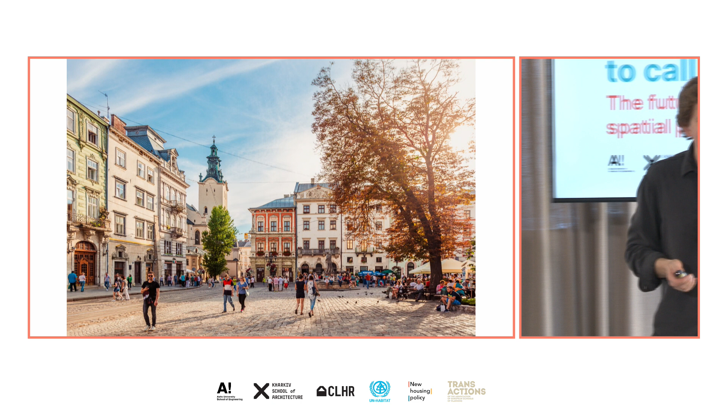So let me start with this beautiful picture. I guess everybody saw it. This is the city of Lviv, which is included in the UNESCO list under preservation. Of course, it's also a major point for tourism in the country, for people to come and see Europe in Lviv from other cities.

It's also very important that this kind of life and even attractiveness is preserved during wartime, so people from other cities and localities can shift a bit, have a rest from their environments which are less safe than Lviv, and also experience this culture and visit museums and different institutions. I guess there are some people watching through the window.

So we cannot exclude the strikes and attacks on the city, because there is indeed no safe place in Ukraine, in the whole country. Basically 40,000 Lviv citizens, including men and women, are currently on the front line. This is our reality. Every family, everybody has some friend or relative on the front line and worried about their life, and also knows people who already died protecting our land.

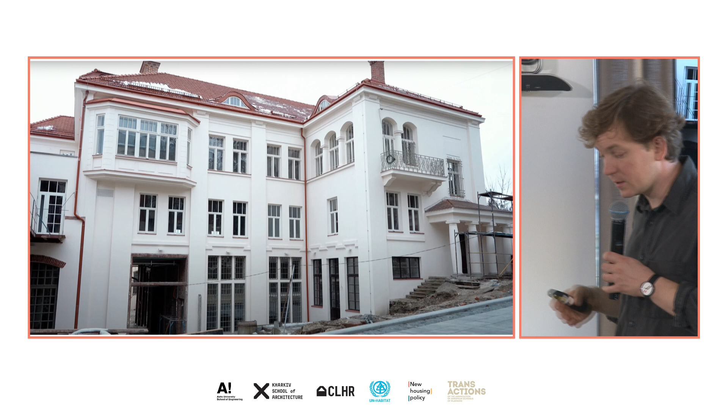Another example is the tram depot and first electrical substation, built, if I'm not mistaken, by architect Kamil Brodsky in the early 20th century, and now renovated for the needs of a cluster of different economies. There will be co-workings, event spaces, and different kinds of activities. We hope that—and you know, it's happening right now.

So while there are sometimes these rockets falling on our heads, at the same time, people invest and renovate, putting brick by brick, piece by piece, to really take care of the heritage.

Basically this process started very much in these years, with the project by GIZ, the integrated development of the city of Lviv. There were different workshops and programs started to educate renovators, restorers, people who can renovate doors, windows, different wooden elements. And basically the program of co-financing by inhabitants also started.

This is also the time when there were first discussions on how we should renovate the whole inner city in general, about introduction of public spaces, about changes in mobility, bike infrastructure, and other things. Iris Gleichmann was guiding this project. I just met her a few days ago.

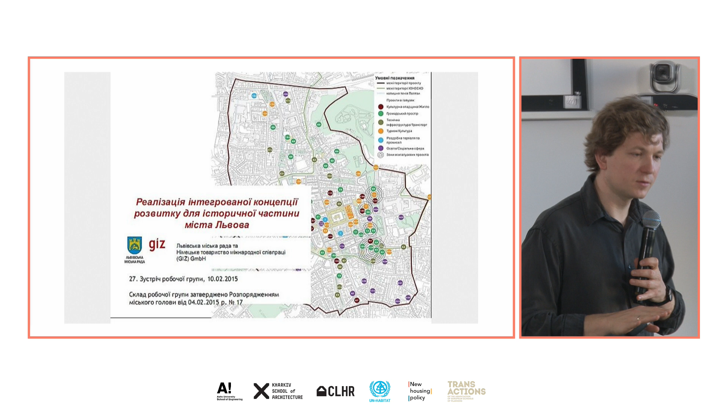One of the priorities was, of course, working with the question of the city as a city of different religions and nationalities, communities of Jewish, Armenian, Ruthenian meaning Ukrainian, and also German and Polish, having this multi-cultural image of the historical city represented today. So one of the first projects was the synagogue square, marking the places which were important and also dramatic for the Jewish history of Lviv.

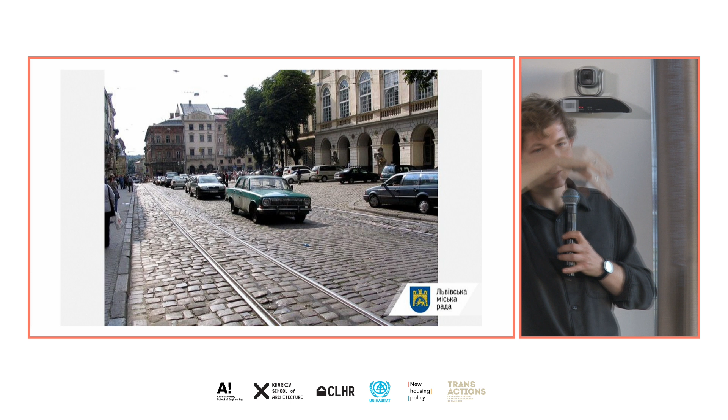Basically, many things at that time changed. We have this Rynok Square, the main square of the city, looking like that. This was, of course, a place for the car of the mayor, some vice mayor, and so on. It was like this in the 90s, with even a place for the chief architect, maybe.

But now I came here with a bike. When it's possible, I always use the bike, and I also have a car. I use it, but I have no possibility to park it closer than 500 meters to the workplace. It also becomes more expensive every time, and it's good that it's like that, because it's indeed a shift in our logic of how to use mobility in the city.

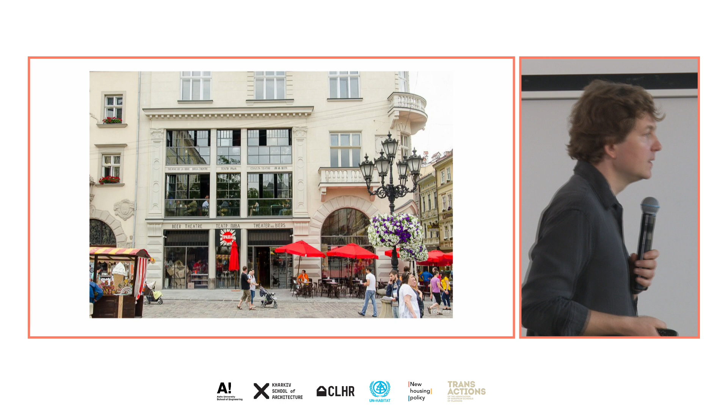So basically, freeing the space from the cars and allowing people to use it became a big impact for renovation and for developing tourist attractiveness and tourist infrastructure. Also, trams produced in Lviv and a new tram line, unimaginable before, became a reality, connecting a big settlement, a neighborhood in the city, with the city center.

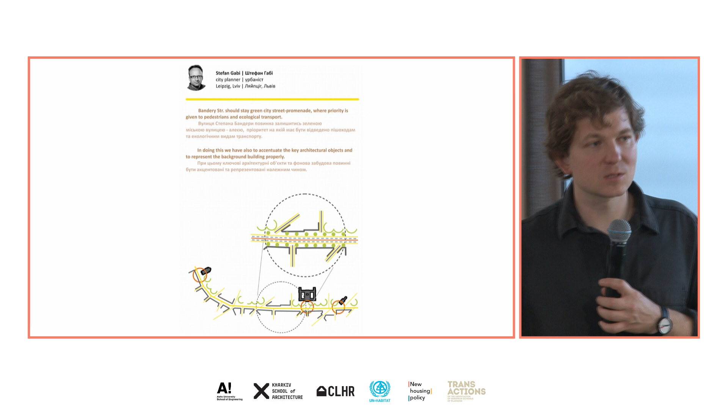And it's all with participation, with many discussions, many workshops, and so on. Also the renovation of Bandera Street, where Stefan Gabi was working at the time, became a very important step in rethinking streets not as roads, but as spaces between the facades, so there is space for everything and everybody, and we should weigh the importance of different users and make it accessible for everybody. Many things like that, also working with the space and with some dominant objects, buildings, places, and so on.

And other spaces, I will not show everything, but that gave us the idea to look at the city in general, to develop the integrated development concept. I'm slowly coming to the topic of the forum, the spatial planning. Basically, we thought, what if we do this integrated development concept for the city of Lviv?

At that time, the chief architect Julian Chaplinsky invited me, after I proposed to him that there is this integrated concept in Vienna, let's do it in Lviv. And he said, yeah, let's do it. So I have a lot of things to do, so please, if you have such an incredible idea, just visit all these meetings with different departments and let's do it somehow together.

For me, it became very clear how little communication there is between different institutions in the city hall and departments, and the lack of that is just incredible. This project became like a platform for this interaction.

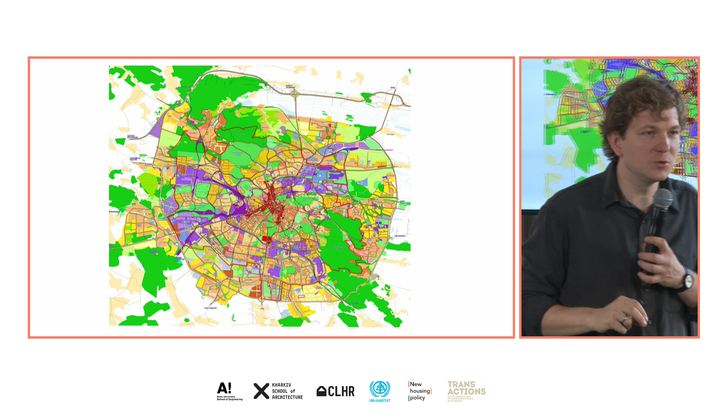It's also planned with all these instructions on how to color things, what fonts you need to use. But at the same time, it's planned so it's maybe understandable only for people who can read 50 shades of violet or something, because it's impossible for the naked eye to differentiate between these shades of every color. So I believe that in terms of graphics too, there was a need to shift to something else.

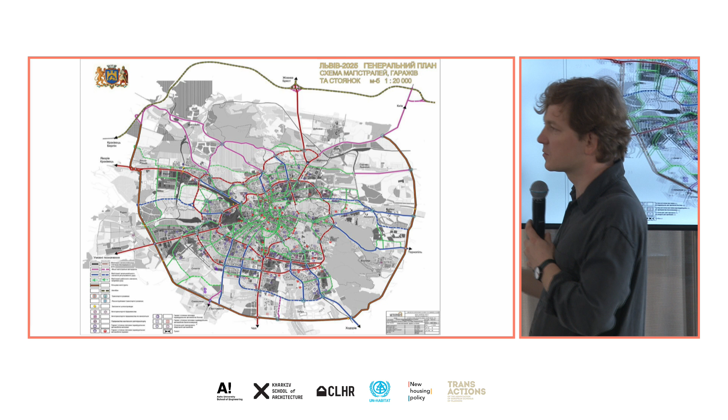Also, every one of these master plans is supported by different schemes, for instance on mobility. So we see that the idea to extend the city, to build it outside on the outskirts, also involved building many roads, ring roads and tangents—things that would really impact the city, making it car-oriented, I would say.

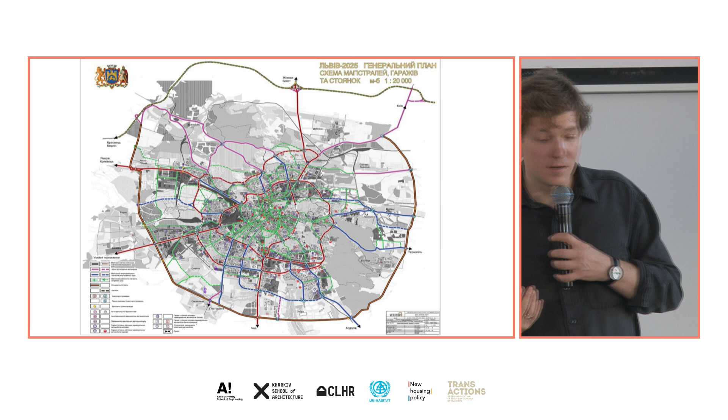There's a detail that all these plans needed a lot of investment to build like 1,000 kilometers of tunnels and ring roads, like highways. It would cost money that maybe the city of Zurich doesn't even have. So we were lucky—there was no money to really build all these ideas.

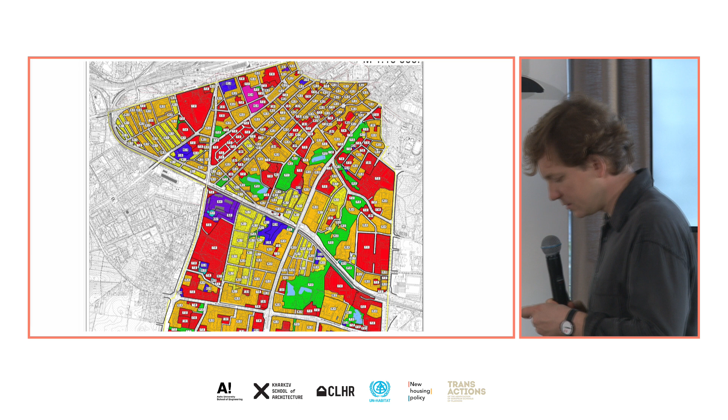And then, as I started to mention, there are official layers of documents and formal planning documents in the country. So there is this master plan, and there is also a zoning plan. The zoning plan is an addition to the master plan—it's meant to be a more detailed version of the master plan.

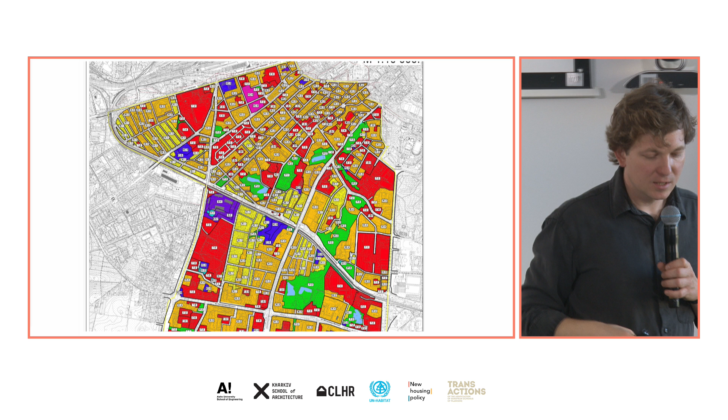So when there is a master plan housing area, here it's housing area up to 6 floors, housing area up to 12 floors, housing area up to 4 floors—different kinds of gradations. These plans were developed through 2014, 15, 16, and became part of the master plan.

And then there are the detailed plans—in Germany, Bebauungspläne—and this is a kind of document that served us to improve certain places, because when there was a brownfield to change through the master plan, it would take another 20 years with all the procedures. It would be almost impossible to do it.

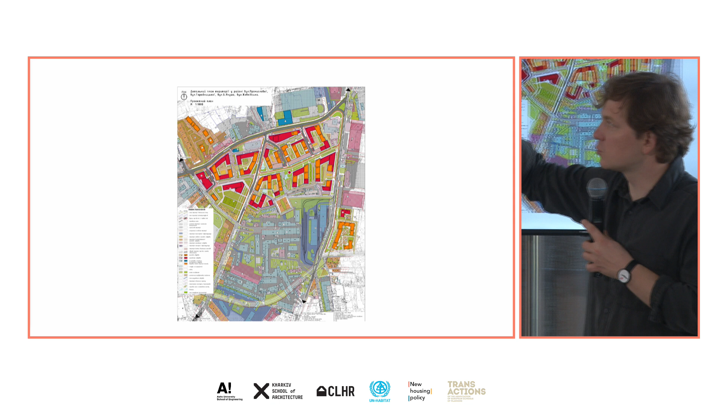Here it was possible to rethink bigger areas and do a master plan with a new approach—to create a boulevard, to create courtyards and a school, to place infrastructure that is absent in this kind of district.

Basically, we came to changing zones in this zoning and in master plans with these detailed plans. It's actually done all around the country, and this is the procedure for how it's done. Yes, it could be criticized, it could be bad or good—I think it's just a reality.

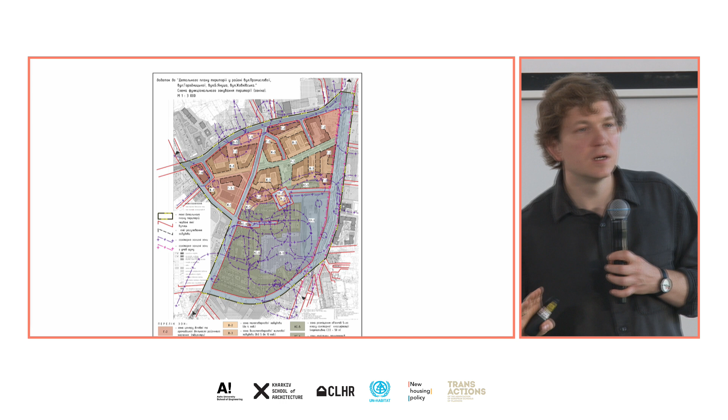We try to avoid the threats that this process can bring. So in general, as we develop these B-plans, we look a bit wider at the general picture, analyzing the situation across almost all of the city, so that these changes or improvements are indeed improvements and not, let's say, making things worse.

But starting with this integrated development concept for the whole city, we thought, okay, let's think a bit from scratch.

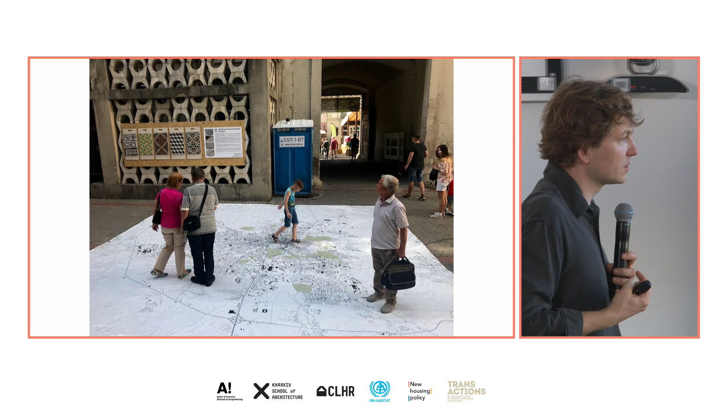Let's invite inhabitants. There were many meetings and presentations in different parts of the city, communities, districts, and also here in the courtyard of the city hall. We printed, we drew, we were really open to see the things, but we also spoke to the people and explained what is important in today's world, with the prescriptions of UN Habitat, of different European institutions, of the Leipzig Charta for integrated development.

What are the basics for spatial development? Based on all of these meetings and discussions, we came to a very simple conclusion: it's important for the future to stay a compact city, not to build on the outskirts, or to build minimum there—instead to think about renovation, improvement and intensification of the inner resources of the settlement.

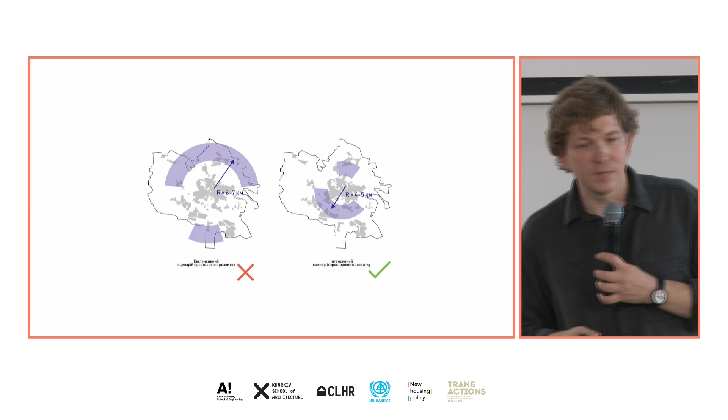And basically, we still had a lot of brownfields and so on. A city with a radius of 6-7 kilometers becomes a car-oriented city. But a city with a radius of 4 or 5 kilometers is, you know, a tram city, a pedestrian city, a bicycle city.

So it's really important for the city to stay compact. It's also interesting to compare the city of Lviv with the city of Vienna, for instance, but we can compare with others in Europe too.

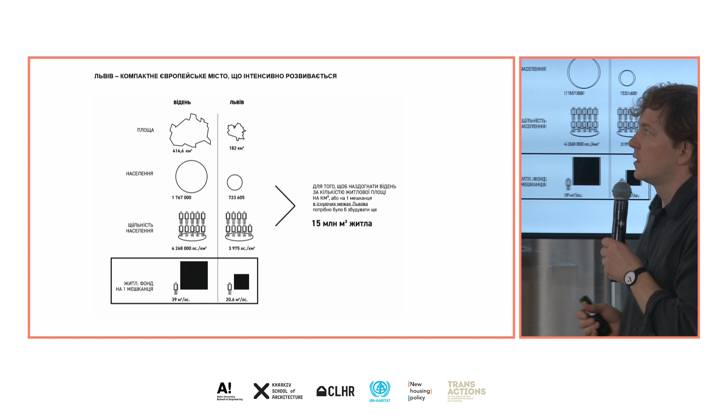So basically, the city of Vienna is more than double as big, also in terms of population. The square area is 414 square kilometers, Lviv almost 200, like 182. The population is 1.7 million here, versus 723,000 inhabitants.

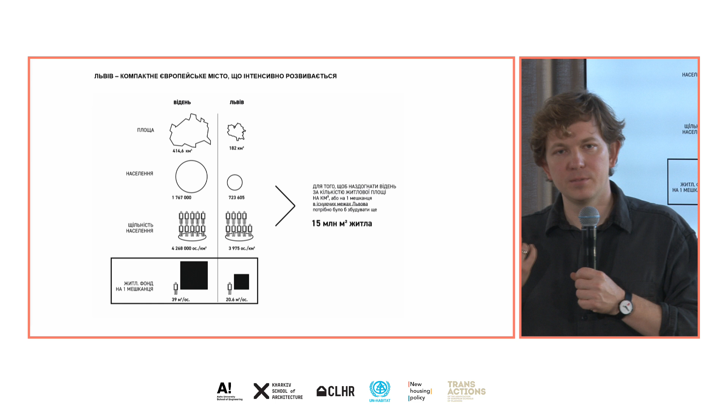If we calculate the density of population, it's almost the same, giving us plus minus 4,000 inhabitants per square kilometer. But if we calculate the buildings, in Vienna per capita there is now more than 40 square meters, actually 45. In Lviv at that time there was 20, now it's 23.

So to imagine, to have the same quantity of area dedicated to living there—just to live, not to work, not counting offices, not counting that Vienna also includes the Danube River, mountains, parliament and so on—just for living space, we would have to build another 15 million square meters inside the existing borders of the city.

Just for the cities to be compared in terms of infrastructure and buildings. So it was an important comparison for us, and it gave us the idea that there are still resources in the city—we indeed can be densified.

This is my colleague Marina Polishak, who at the time did an incredible job. She calculated every square meter in the city—there were huge tables and calculations, and we could compare the density in very small clusters.

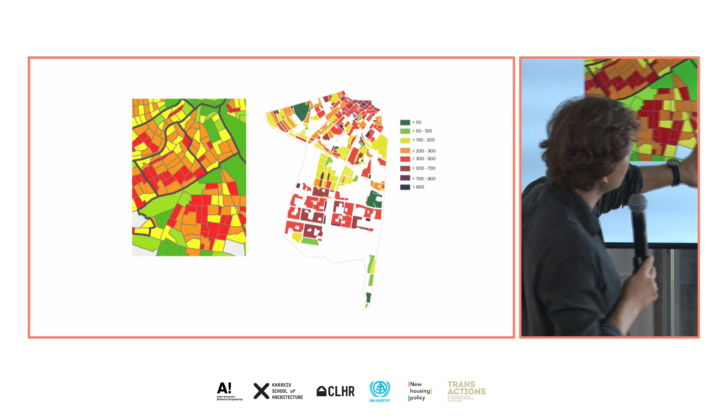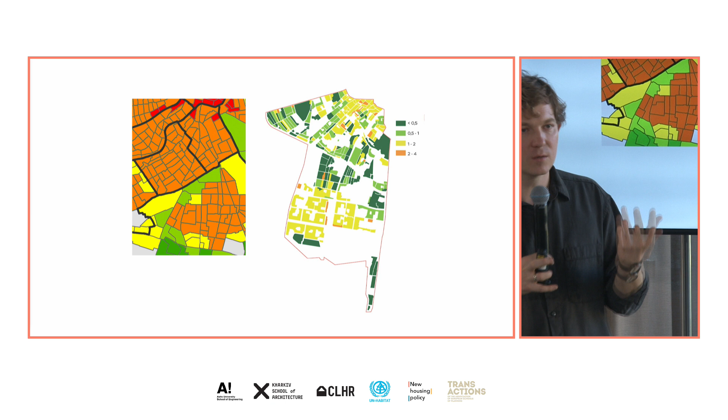This is, for instance, a comparison between Vienna and Lviv in terms of inhabitants. You see the density of inhabitants is almost the same, sometimes even more on some clusters. But if we compare the density of buildings, of housing, it looks like this—you see this density and this density at the same time. These three generations of families living in one apartment is very visible in these kinds of schemes and examples.

So basically, the idea we took as central in the integrated development concept was really not to extend the city outward, to let it be a compact city for the future, and to question all these ring roads and car-oriented infrastructure and construction on the outskirts. In many cases, also the intensity of construction—yes, we can have some development, but maybe 4 floors instead of 16, instead of crucially changing the image of some neighborhood, some village, and so on.

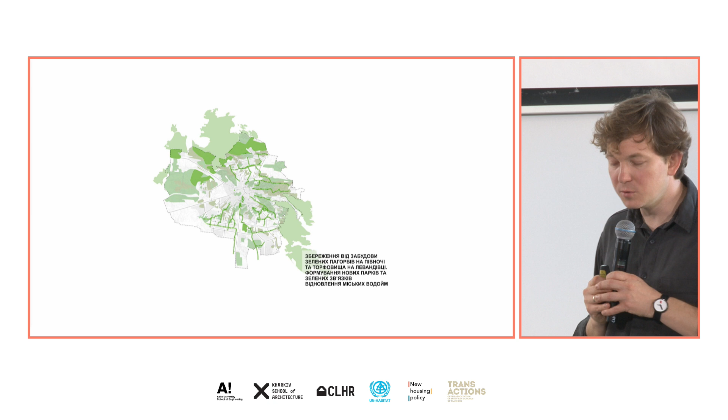And also here, this is the basics for the city, which is a very landscape city with a lot of green connections, important forests, a unique landscape consisting of different natural environments that collide almost in the city center. So basically this should be a framework for developing the city.

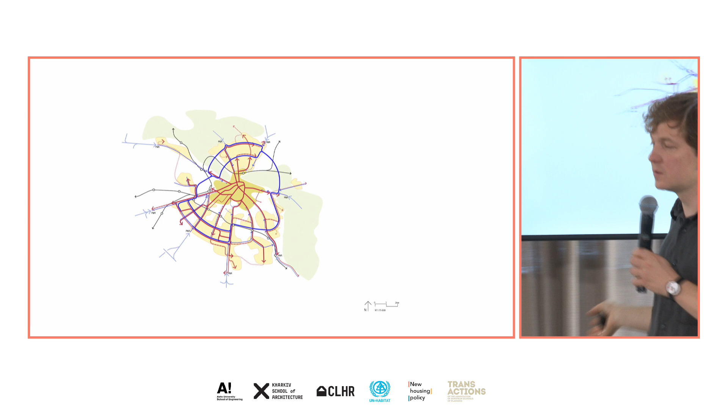And of course we have these resources, and we identify the crucial elements to develop the city, crucial spaces to change, to rethink. We also saw that in terms of mobility, there should be priority for public transit in the districts around the city center.

But there should be a dominance of public transit in the city center. It became also the major idea for the sustainable urban mobility plan developed in parallel to the integrated development concept. And there is Pavlo Sirvatka and Alexandra Sladkova, who worked on the sustainable urban mobility plan.

So when we took all of this together, it became an integrated development concept with the definition of centers, sub-centers, the idea of a 15-minute city, having sub-centers, densifying the axes—not roads going into the city center, but axes of the city densified with urbanity, with this quality found not only in the city center but also in other places in the city, with short contact to green zones and so on.

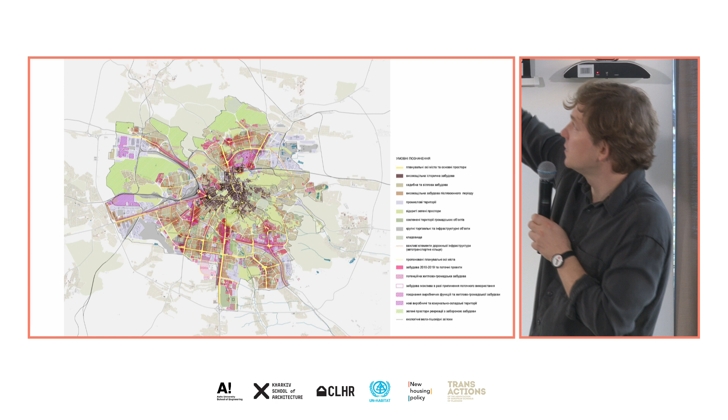So in general it's more detailed, but you can also compare it to the master plan of 2010 and see that it's even more understandable—you can see even the Rynok Square and the City Hall and all the spaces, which is important because spaces are the basics of the city. And the street is the most important public space, actually. We have to think about it as a public space. So in this image, we wanted to give this idea also drawn out.

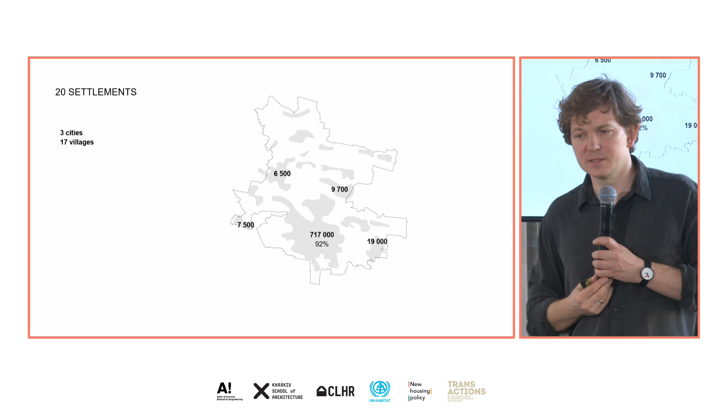Now we have new challenges in urban development for the next concept for spatial development. Since a few years, we became not just a city—here is Lviv, the city, down there—but we became an amalgamated community consisting of 3 cities and 17 villages. This is an important challenge because nobody in Ukraine did this kind of integrated development concept for the whole territory.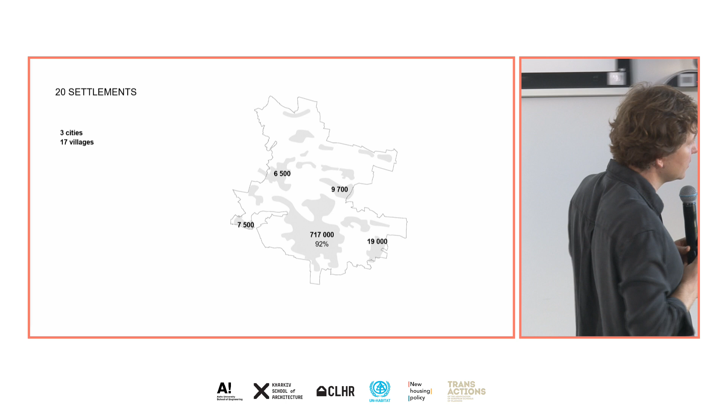We started the process and are now in the middle of developing the integrated concept. We've already held a few meetings where we presented a lot of ideas and reached many people. I know many people sitting here are involved in the process, and it was very important for us.

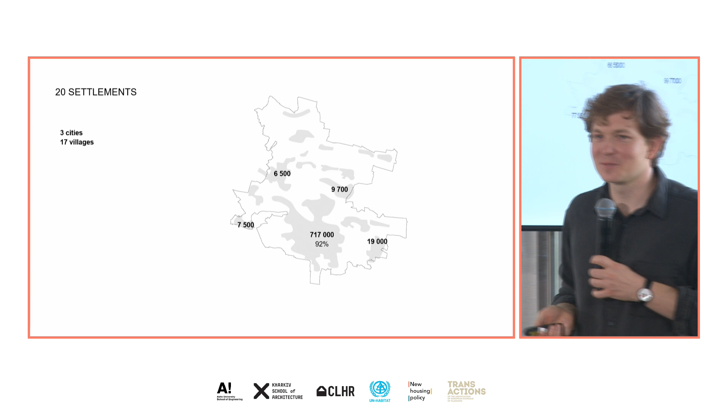After this informal process, once we finish the integrated development concept, we will move to the formal one, which is new in our law and is called the comprehensive plan. In Ukrainian it's named 'complex plan,' but rather it should be 'comprehensive' in English terms. We have many sketches on this, but it's very raw, just where we started.

Basically, what is important is to know what will happen with the demographics, and this is crucial. If we look at where we are now, in 2024, it looks like another 12% of inhabitants. Many IDPs came to the city, and they're still coming. This is not our own research, it's the statistics of the oblast, of the region.

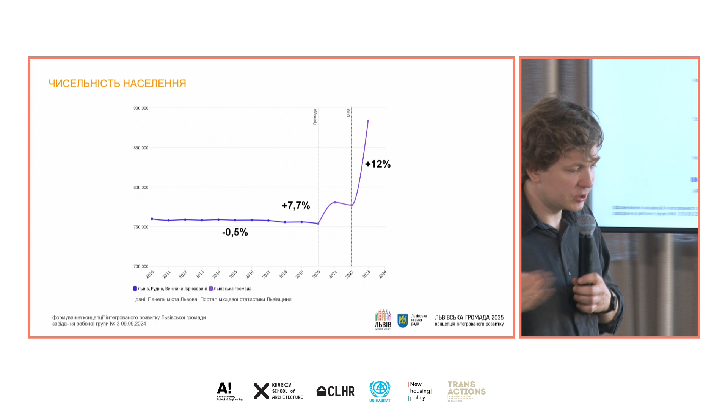But in general, there is other research, and you can see this kind of shift upwards, which will basically end soon, and then there will be a shift downwards. This is very important because we have birth rates which are the lowest possible.

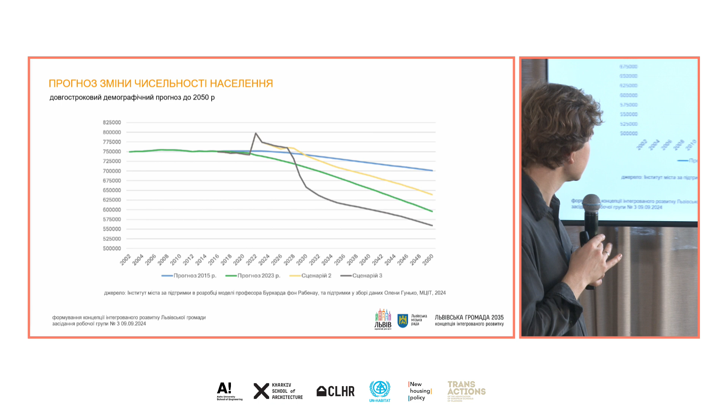We also have many issues with migration outside the country. Again, this is not our own research, but the work of Professor Burkhard von Rabenau from Germany, who did this research with colleagues from Ukraine.

Basically, the idea is that we have to count on three possible scenarios, but every one of these scenarios shows a decline in terms of inhabitants. This is very important for the economy, for the future days to come in the city and in the country.

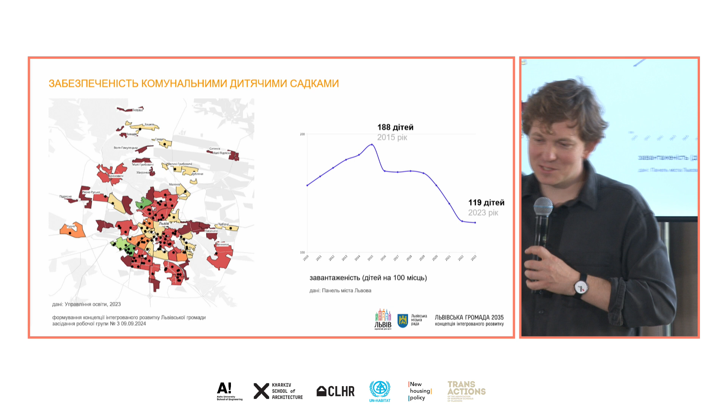And of course, the statistics are not the best point in our culture, let's say, or in our urban planning situation, because it's really hard to count on any statistics. For many things, we do our own research.

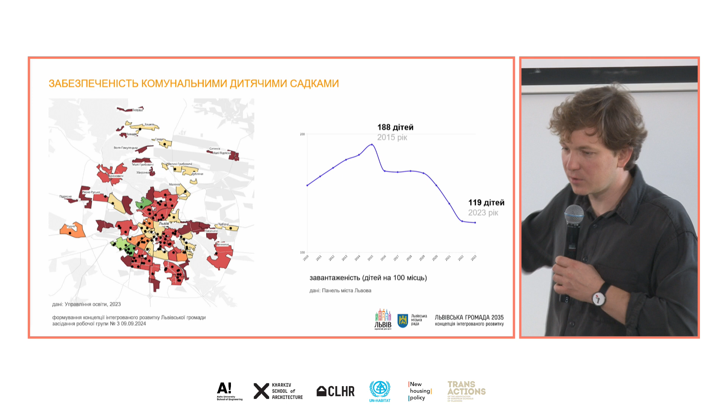We also constantly have a dialogue with many people in the city hall, for instance the education department, to study what the actual number of kids in the schools is and how it changes from one year to another. We have it all online, and we analyze it. For instance, for the kids in school, we see this kind of curve of existing places and this curve of existing pupils.

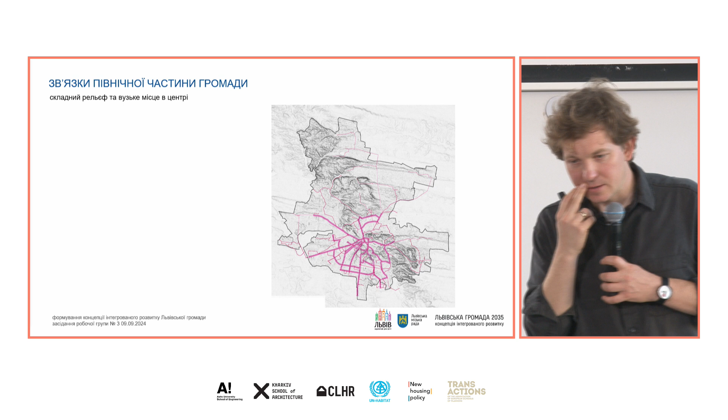Many other aspects of developing this integrated development concept for the whole Hromada, for the whole amalgamated community, take place. As I said, we are just here at the collision of the Podillia plateau and the Roztochia region.

Basically the continental divide - I don't know if that means anything to you. This is the line where... I don't know where it is exactly. Maybe here. No, here. Okay, this is the continental divide.

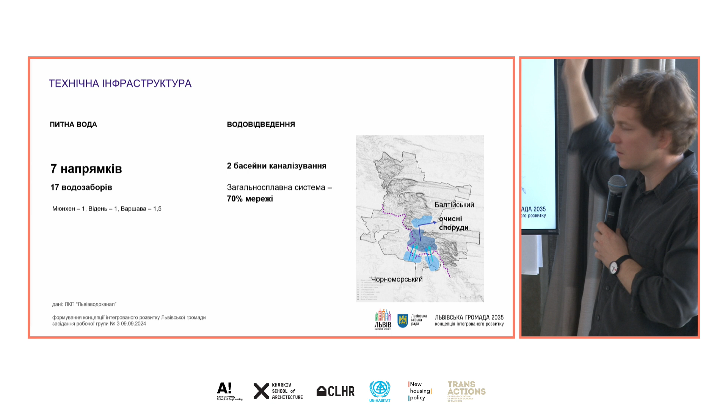So the water from here goes to the Black Sea, and the water from here goes to the Baltics. This is important - it's a unique city situated on that divide. That's why we have a lot of problems with water.

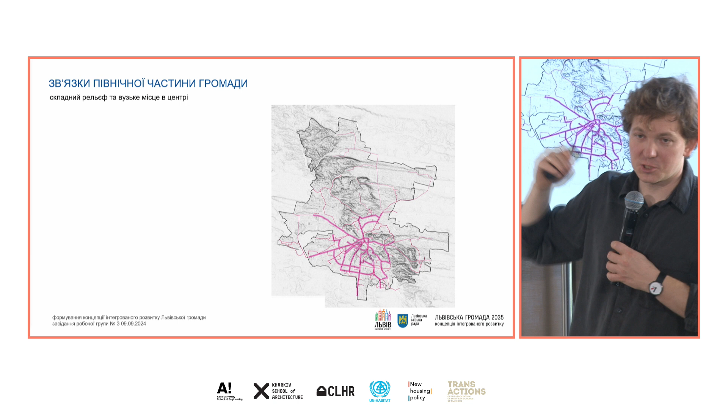At the same time, we have to think about all of these matters while we develop this kind of integrated plan - where to place the sewage, how to pump these things through this continental divide, and so on.

Also connections - this city of Lviv was constantly regarded, in 2010, 2008, as a concentric radial city - very simple, like on a flat surface. I don't think it is like that.

Every time, I'm more and more thinking of the city personally as a kind of city in a valley, meandering, like the valley emerges into the city and then goes back. I don't know, many cities in mountain regions, like many cities in Switzerland, and so on.

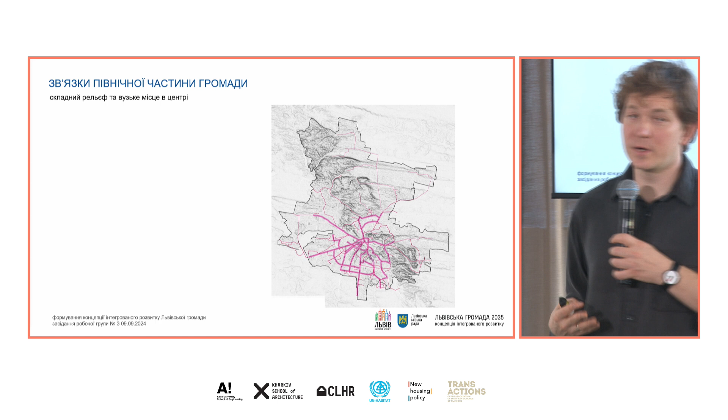They have more similarities than any very clear Renaissance cities in flat Italy, where there's a strict Renaissance model with historical development, and then new parts that are more geometric, more artificial. In our case, it's very, very implemented into this natural relief and landscape.

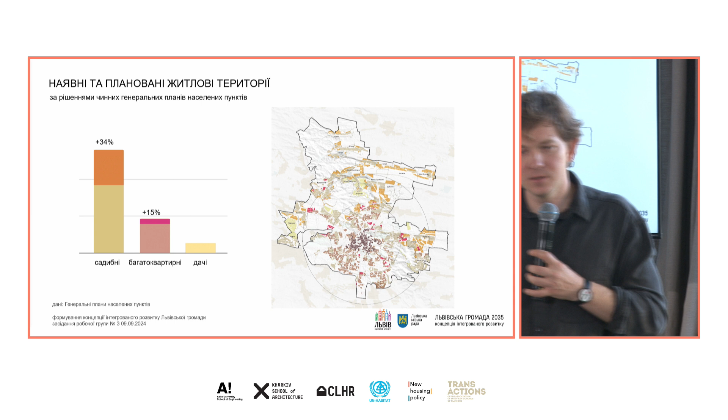And we analyzed black and green, blue and green. We analyzed the existing housing stock and possible developments. By the way, all the villages, before joining the Lviv community, dedicated any vacant land and made it private, giving it to a private person.

So all this land, very good for agriculture or industry, is now private. And if there's a project on my table to build a single family house, I have no right to say no, even if I don't like it, even if I don't want this suburbia to grow intensely. But this is the reality, that these settlements joined the amalgamated community as they were.

And if we want to change this, say let's not have single family housing, let's have agriculture instead, let's do this with a detailed plan, or zoning, or master plan, any kind of instrument — we are not allowed to make the law against the will of the owners of these land plots. This is the critical point.

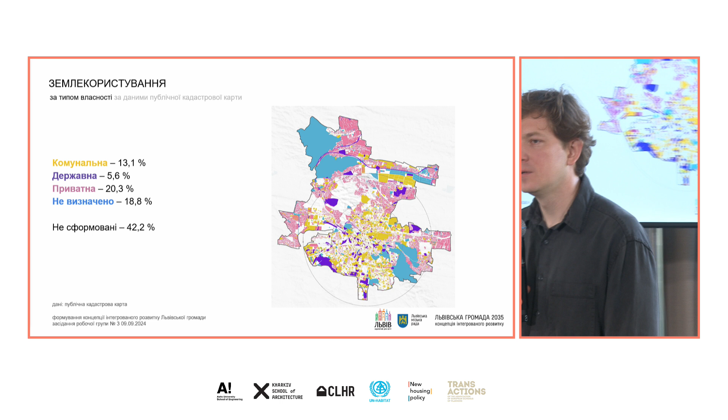So it's a huge thing to think about, and I think it could also be solved with an active land ownership policy of the city, to acquire land and use it for later developments and strategic needs. So this is another point to discuss, and we are discussing that. In general, this kind of land use is a huge issue in every community in Ukraine for future development.

Technical infrastructure and so on. And also, from the start of the war, there was a discussion: let's bring to Lviv the European gauge of 1435. Let's have a sub-station with people coming to Briukhovychi, and then by buses and marshrutkas to the city center, something like that.

Which we thought maybe isn't the potential of our city — maybe we have to dig a bit into that. And basically many meetings of the mayor, the vice mayor, many people, me included, with officials in Brussels and so on, gave their effect, I should say.

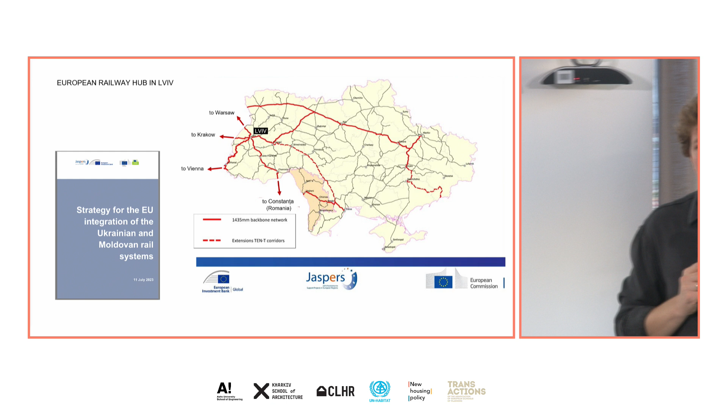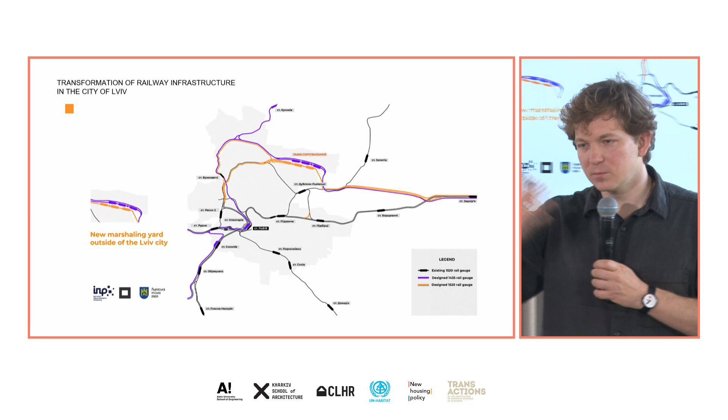And in this study of Jaspers, Lviv is just a major point on this crossroads of 5 directions, connecting Constanta on the Black Sea, Romania, with the Baltics in the north. So this is important for the development of the railway. Of course, it has a lot of things to do to redevelop the system over the next decades, to shift the yards, to combine both 1520 and 1435 gauges in the city.

This is another thing, so these are just sketches, and also to eradicate many developments, many areas — this is our daily work. And it's very important that we have very bright guys in the city council, for instance Rostislav Belinskis, who is guiding the local institute, who is like a railway freak, I can say, and he knows a lot about that.

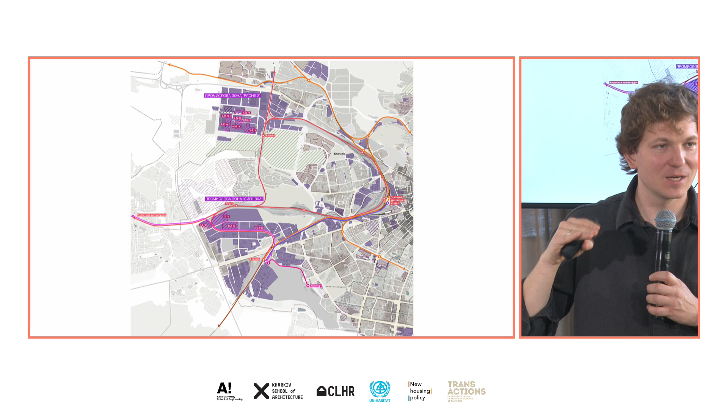And really, these are the people who can change many things on this strategical level, because they can really say, 'the local railways — no, let's make this overpass not like that, but like this.' And they say, 'oh yes, really, we didn't think about it.' Yeah, you as a local, you know it.

Another important topic, shifting back to the roots of spatial organization — very important for me. It's about spatial development, but also about architecture, about how we actually do spatial development: we put building next to building, build streets, and make public spaces. So everything is done step by step. Even looking back 20 years of history, how it developed, we see the major changes, but it's done on a daily basis.

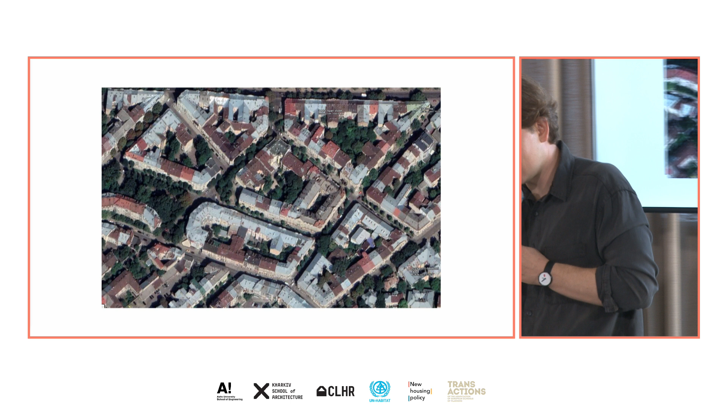And for me as chief architect, it was very important to introduce this more traditional scheme for the blocks, returning back to the spaces of the city. Because I really like this quote that Christoph Wessling, who is sitting here, gave in his lecture, citing Colin Rowe.

That there are buildings which are space occupiers, and there are buildings which are space definers. So we want to build a city out of space definers, which really define the spaces — the most important spaces, the streets, the squares, the parks, but also these courtyards, the common spaces where the inhabitants of the block are the owners of the space and are responsible for it.

We can compare it with Sykhiv, the settlement from the 80s, where it's impossible to say where the street is — is there a street, or is it already a courtyard? Is it common space, or public space? It's unclear. So we are for developments that are clear in terms of putting everything together with a correct structure of spaces in the city.

So this was historically the city in Lviv, historically the courtyard in Lviv. And this is the new street in Lviv that was constructed recently, and this is the new courtyard in Lviv constructed recently.

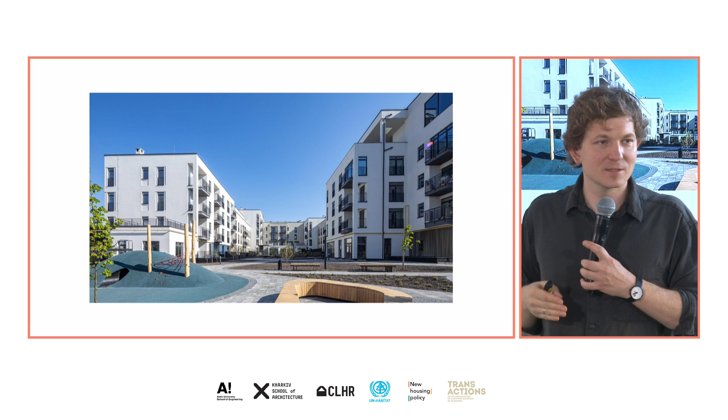This is nothing special for any German, Swiss, Austrian, or French city, but it's very special for Ukraine to have this kind of quality in spaces. This was done by ABMK architects—I should always name the architects, because I think there isn't enough attention to who did the job. This is one of the first like that, the Belayev brothers, who planned the Magnolia complex, realized with this courtyard and street life.

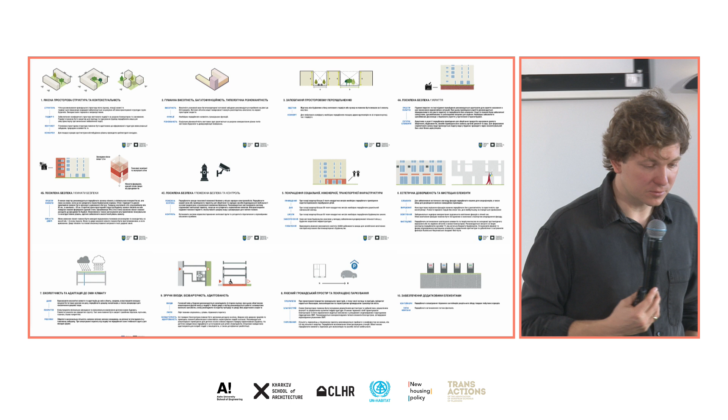We also introduced new housing standards at the start of the war. We discussed it before the full-scale invasion, but we thought, no, we don't have to wait for tomorrow—the development of the city goes forward, there is construction, we have to really change standards and improve them.

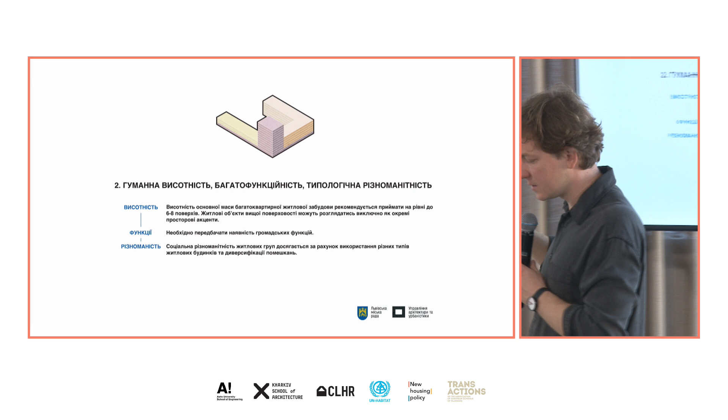Basically this is a spatial approach with different typologies, but still defining public and common space, even in forms like public or urban villas, with standards for human scale. Development should be 6, 7, sometimes 8 floors, not walls of 20 floors, which is okay under our law—our law says you can build anything. If the insolation works and so on, you can build walls of 20 floors, no problem, no criteria, no values for human scale. So this is what we also tried to introduce.

And other things—how the spaces work, security, sustainability, many details. But in general the rules are very simple. They were communicated to developers and architects, developed with them, and I should say they work. Now, after 3 years, we see it had an impact on what we built and how we built.

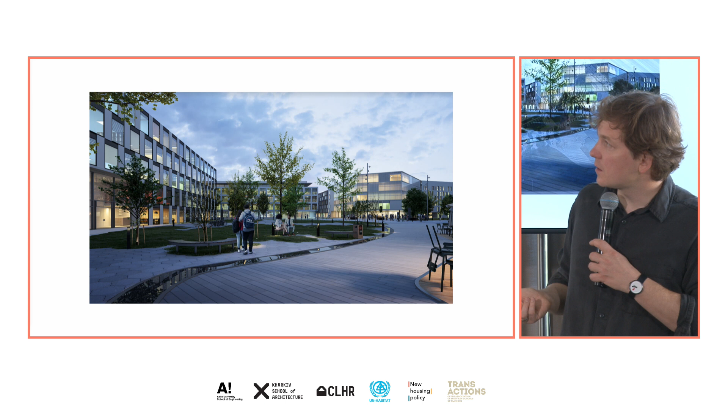To do something with that, we decided to come with some image, some possibilities. We developed them together with Vienna Technical University, based on many ideas—it was kind of an instrument of test planning, so to say. We came to some possible parameters with images, and made even fancy renderings just to place on the table, to have all the owners at the table and say: you see, there is potential for that, so let's talk together about how to do it.

I think a time will come after the war when we will indeed have a serious change on this place. The right part is already existing; on the left part there are these ugly kiosks. So we will have, I think, a good continuation of the city development there.

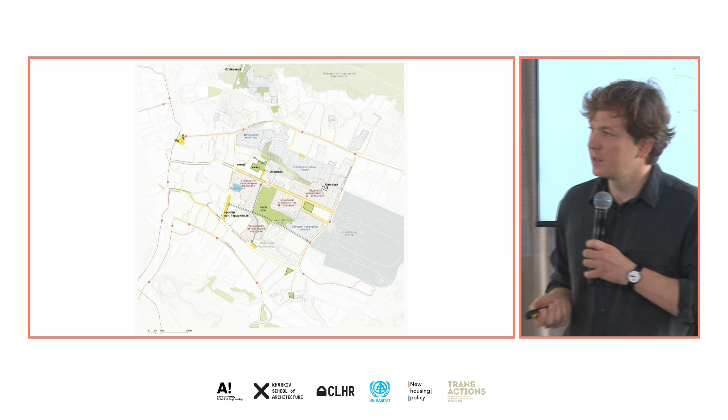Working with local communities is another important problem. In major districts of the city, we split them into smaller communities and communicated with many of them, sometimes defining priorities for what is most important to the people. Even during wartime we're doing very small, modest interventions for different ages and social groups.

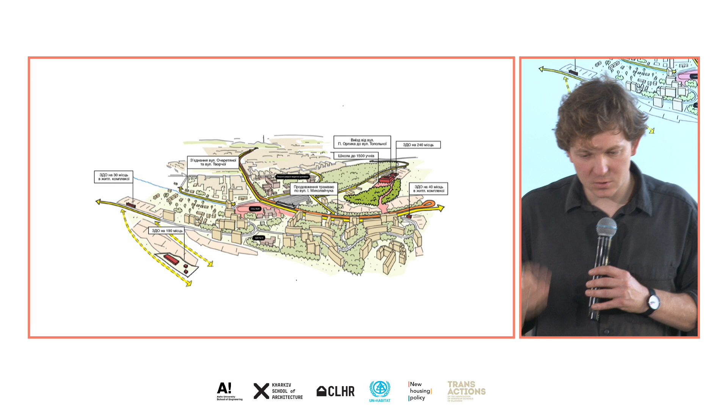Discussing with many local communities, we always come with sketches and ideas for how to communicate things. In some areas, like Pidholosko, there was a change in terms of land use and detailed plans, through the decades—even today.

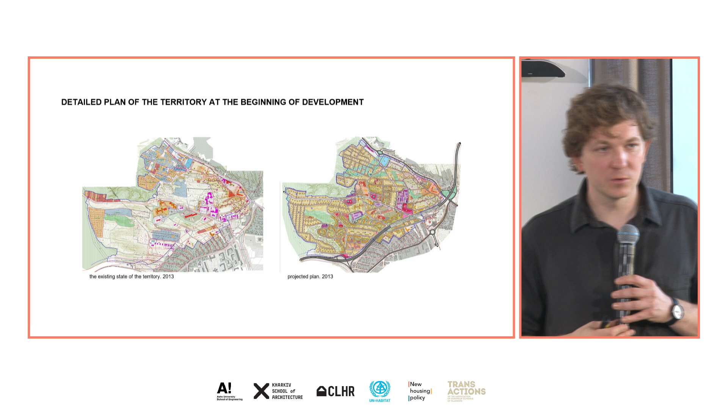At the start of my work at City Hall, it was almost blocked for any other direction. So that was the decision to really freeze the development of this district before any common plan with the inhabitants would be developed. It took us about 4 years to develop this plan, so that every local group agreed and was okay. Now we see there will be a school, developers responsible for this and that, and we can give even new permissions with this kind of agreement on improvement of infrastructure.

So the roots of why it didn't happen as well as planned are wide - maybe we can discuss it later. But I should say the price for property here is maybe one of the highest in the city. So when people say it's an urban ghetto and so on, it's really questionable.

There are better things, there are worse things. I understand the inhabitants who are against many things, but it also was housing for the lower price and very affordable, I should say, at the start of this development. There were even kindergartens built here, and it's not full, by the way - it's planned for 300 kids, but only 200 are there.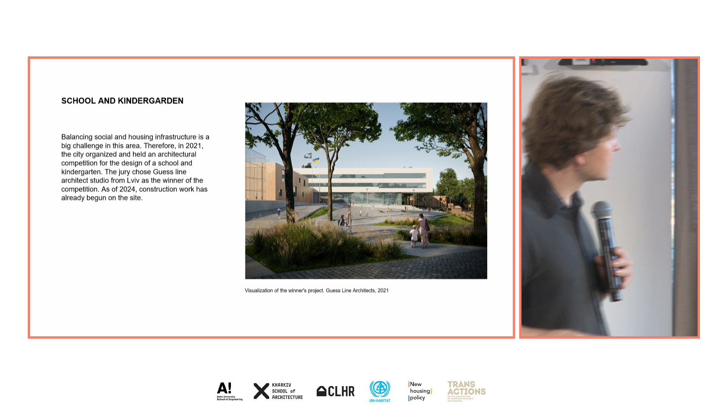In general it's a big question, but I think now we have this common plan which everybody agrees on, and there's a plan for construction of the school. The developer responsible for the school is also constructing the new housing. There were only 3 permissions given since then for new construction, including social infrastructure - done first informally, then formally, with changes on land use, combining places and exchanging them for other locations. Very serious work that half of the city council was involved in.

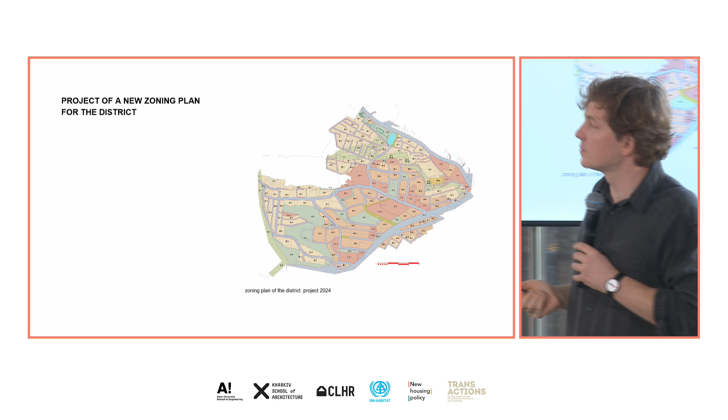Some cases I'll go through fast. These are in the city center - their development, Belayev brothers, their housing - it's very important to rethink many blocks in the city. We make a lot of competitions, this new competition on housing.

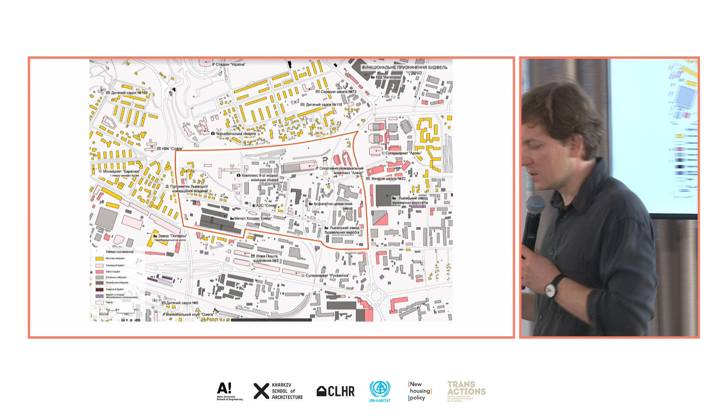This is another big piece, and when there's a brownfield, we start with an integrated development concept. We see the diagrams, the logic, the plan. We compare it with existing good examples from Lviv developments from the 19th and 20th century. We see that it correlates in terms of spaces and scales. Then with every new project it should be built piece by piece, with a lot of discussions, problems, and unfortunately deviations.

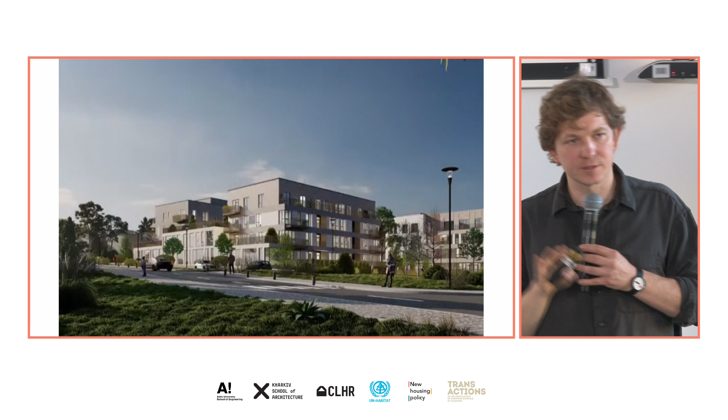On more distant locations, we try to have smaller scale, smaller density, or not to develop things which could be left undeveloped. This is the housing we have - different things, and with every project it's a huge discussion, with a whole story behind it.

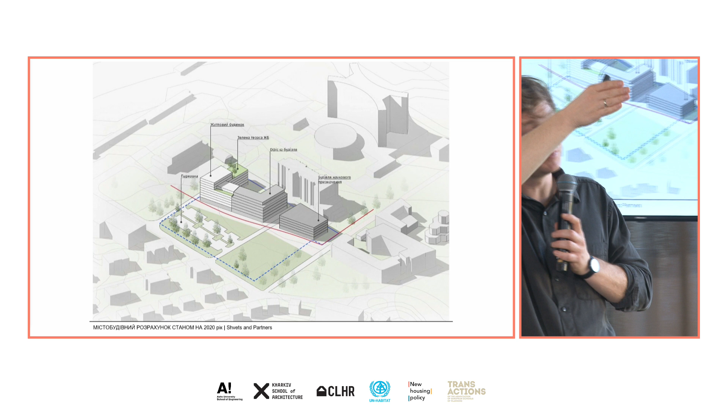It's built - maybe the facades aren't perfect, maybe it's not incredible architecture, but it's fine. In terms of scale it's fine, and there's no deviation from that idea. We even made a competition on facades and landscaping. If you talk about office spaces and this 15-minute city concept, incorporating work spaces into the living districts is very important, and we have many new projects for that.

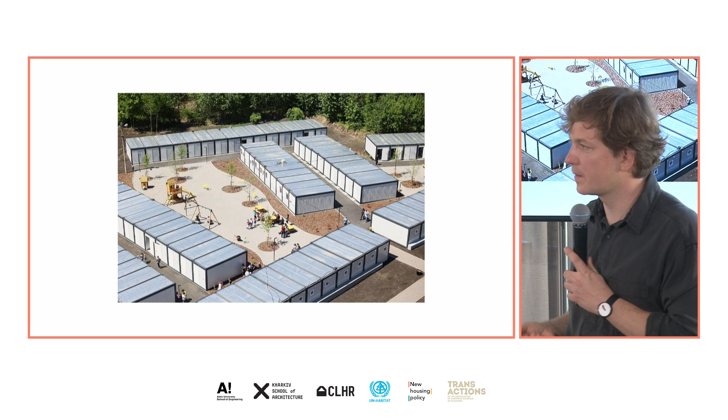And we have whole trains with victims of the war, with wounded. Sometimes lines of cars, sometimes whole trains, and every time there's a strike in the east, the wounded come. Our hospital alone had more than 20,000 additional patients during these 3 years.

And for that, the municipal project of Unbroken started. This is a project aimed at medical help, but also rehabilitation at different stages, prosthetics, mental health, and all the other things to help those who need it most, plus temporary and permanent housing, and many other things needed during wartime.

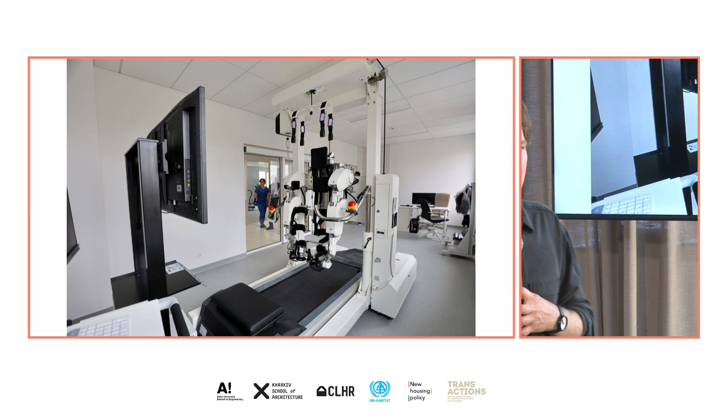We have equipment and support from many partner cities like Freiburg, Würzburg, but also Warsaw, Vilnius, and many other partners. In each building there's support from the German government, IKEA, Philips, and different manufacturers.

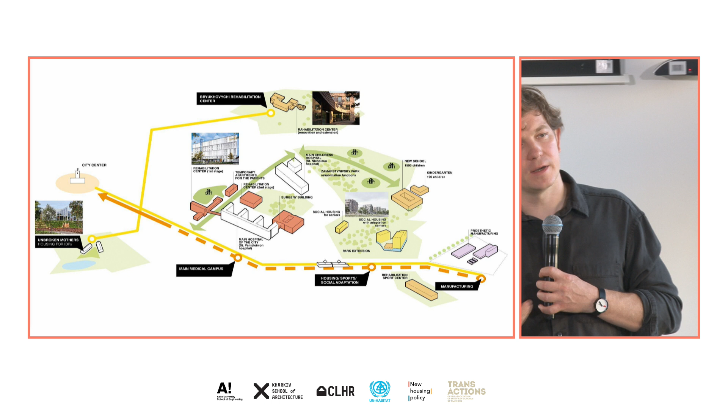These are photos of the things we did, but the speech is more about spaces than about architecture. So this kind of ecosystem became important to develop in the area around the main hospital and many areas in the northern part of the city.

And now we also made a competition for the tram line connecting the city center with this district. In this ecosystem we have not only new constructions, prosthetics manufacturing, but also housing, sports facilities, schools, and many other things. Just to give you an example, this is the prosthetics...

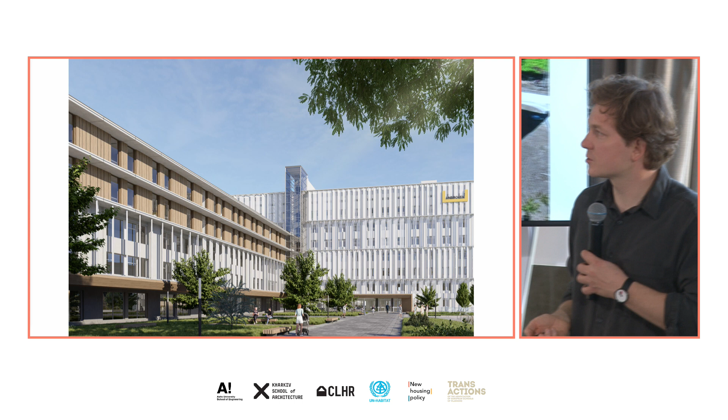Prosthetics infrastructure - we built it out of cross-laminated timber for fast, quality construction, using a lot of prefabricated elements. This is the prosthetics factory workshop, another 2 floors in cross-laminated timber on top of 3 existing floors under construction, now almost ready.

This is a project by Shigeru Ban Architects for the hospital, together with architects of ABMK, who also developed the previous projects. They are responsible for designing this one - a surgery building, designed out of cross-laminated timber.

But it's not so much about the building, how it looks, but what effect we have. In this family, this girl Yana lost 2 legs, her mother lost 1 leg. After rehabilitation, Yana took part in the Lviv Marathon, and she also took part in the Boston Marathon this year.

So we have a lot of these stories - hundreds and thousands of different destinies that we've kind of influenced.

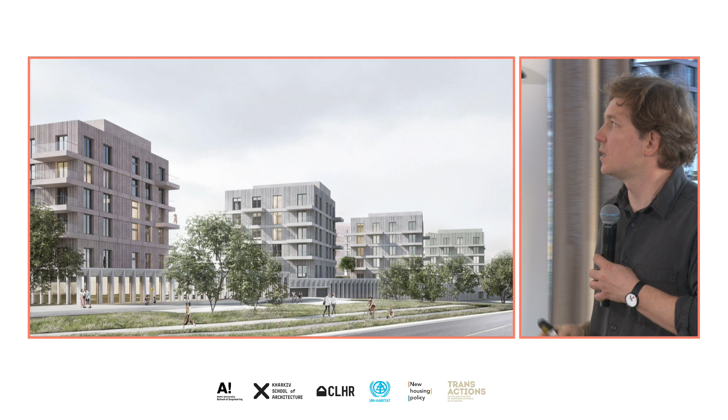This is municipal housing, a project by Oleg Drozdov. We had an architectural competition together with the local architects AVR, who also developed this project together. Drozdov is also now a local architect because they came from Kharkiv to Lviv, so this is a nice collaboration, and we have results.

There's a building already constructed with furniture inside. With colleagues from Freiburg, we visited this building.

This is the tram line, and we think about wider development of this area. It becomes an important integrated development concept for this northern part, which will influence the comprehensive plan of the community as well.

To share these ideas, we have the Urban Forum, with 2,000 visitors and 50 lecturers coming to the city - Alejandro Aravena, Christoph Wessling, and many other people who participated in the Urban Forum, some of whom are also here in this hall today.

And this is about workshops, about bicycle tours, about sharing knowledge. And it's all happening in the time of war.

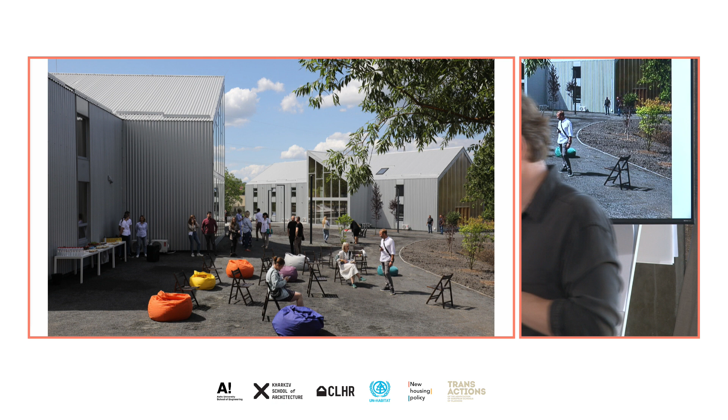To finish, just a few pictures. This is the housing for pregnant women, developed by Sulik Architects, Taras Sulik, local architects. We built these two buildings in 4 months, and they are made out of timber as well.

We have co-working spaces, children's spaces - very simple, modest, but enough space for the community to grow there. This is the housing for pregnant women and families with newborns. And for their leisure, we took some construction garbage, and water came, so this lake emerged, along with a small park.

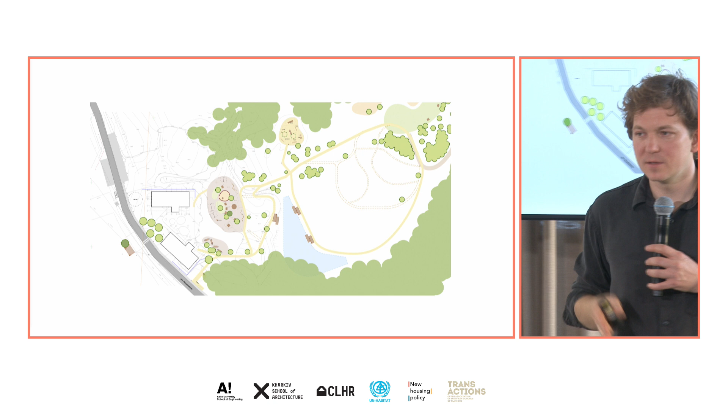So we tried to do the landscaping there with the smallest means possible, and this is the effect of that. My colleagues from the city hall worked on that, and it became a very nice environment, not only for people living in these houses, but for people from around. They meet there, they integrate, they communicate, they help each other. It's an important part of the puzzle of everything we do.

Sports places, and basically we got even the European Bauhaus prize this year, and recently also some kind of landscape prize from Germany. So the project is recognized, and behind every project there are people, and the most important thing is the lack of people, lack of force, lack of thinking. I'm very thankful to work with colleagues like that.

So these three people were responsible for that project, this small park, together with Sasha Sladkova from the ecological viewpoint, they worked to make it happen. So in general, it's about people. Thank you.

That is a wonderful presentation, and we are so thankful for that. I wanted to start the conversation regarding some things I believe we also need to think about as planners, because you talked about so many perspectives, so many challenges, so many directions unfolding at the same time that have to be taken hold of. I'll have one short question, but I really ask you to think now what you want to ask, because we have just a little bit of time to collect questions from the audience.